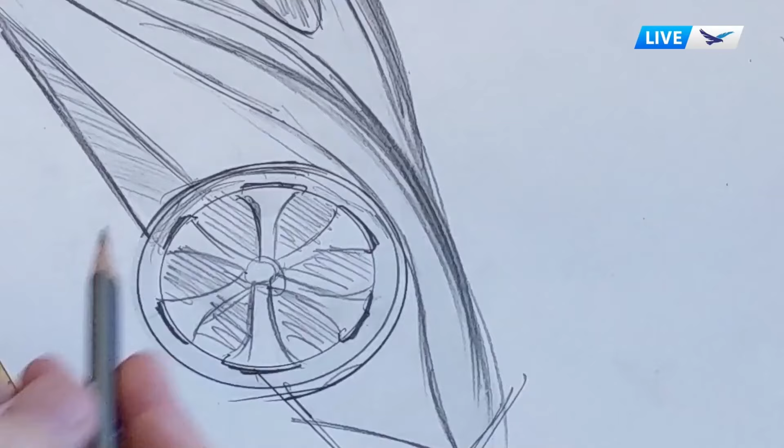Sure. Well, you know what? In my life, passion drives everything, and when things started out, I was always about drawing and designing and building things. And I did it not just for me, but for people around me. Because when I would show off a new painting or a new sculpture or a project, it would bring joy to people. And that's what it was about for me, getting that, hey, check out what I made. And you see that, what?

So for me, it was all about getting joy and capturing fun. And I feel like all designs, no matter what you work on, should provoke emotion, should stir emotion and get people excited. So at a very young age, I remember doing that with finger paints and Play-Doh and stuff. Likewise, creativity is where it starts, right?

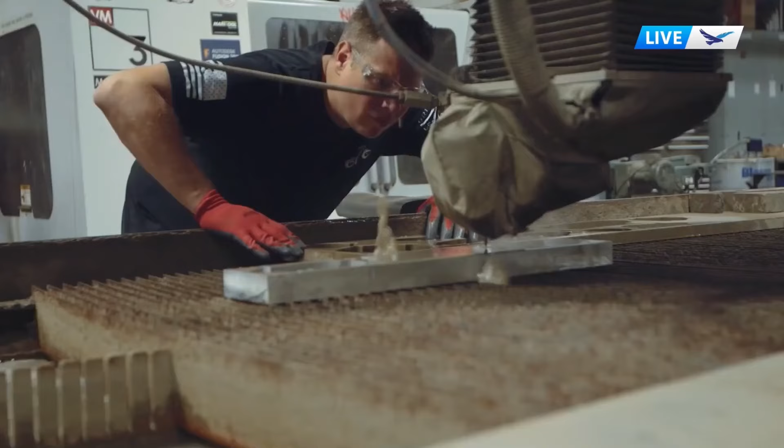I think we're coming up here in a few days on the official 30th anniversary of the first release of SolidWorks. A lot of people have been sharing what the first model they ever made in SolidWorks was. Do you remember yours? I do. For me, SolidWorks gave me power at my old job at Orange County Choppers. It allowed me to make things in real life. So I was making these parts and going right to the water jet and blasting them and hanging it on the bikes. And it just gave me power.

So I do remember my very first thing was a wheel. It was just a very basic wheel. I had 0.75 inches, is all I had to work with. So I had to divide that by 2 for one side and then mirror it over. And it was just a 3-spoke design, very simple. I look back at it now, I get the giggles, but it allowed me to make my dreams possible.

The first time you open a program like that and you realize you could make almost anything, it was almost overwhelming. That's how I felt. So before you started designing, it can be, right? But now that we're in that mode, when you get into a new tool, there's a fair amount of excitement that comes with it too, right? I think we can handle it now.

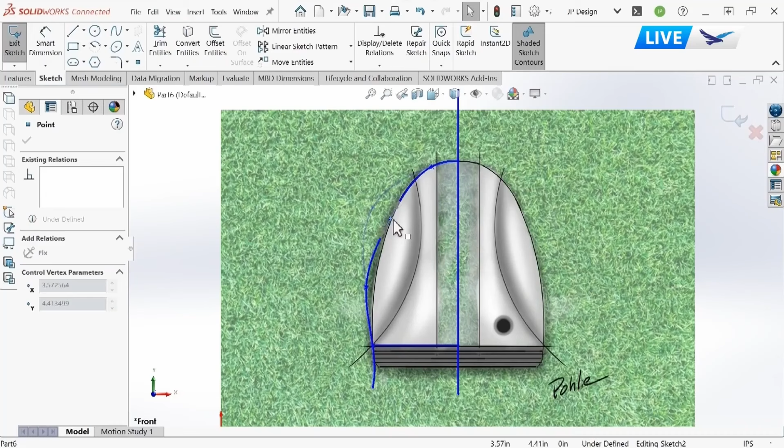You've got to overcome that little bit of fear of something new and unknown. And we all had that first time we were opening up SolidWorks and using it, and it hits you, but it's how you look at it. I looked at it as, oh, look at all these opportunities. I'm going to be able to take files right from here, right to the CNC machine, right to the water jet machine. So I looked at it in a different light, and really just tackled literally one sketch at a time.

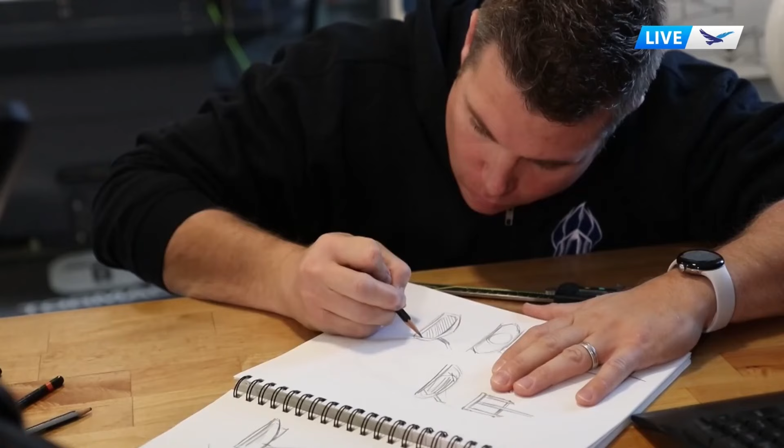Tell us about your design methodology. You've done many projects in your career. Where do you like to get started? Is it with that sketch? Is it with a pen and paper? Yeah, a lot of times I'll start with a pencil sketch and just sketch down a bunch of concepts. And then I build what's called an artboard, where I take different shapes and colors. It could be cars, it could be other things that inspire me. And I build an artboard.

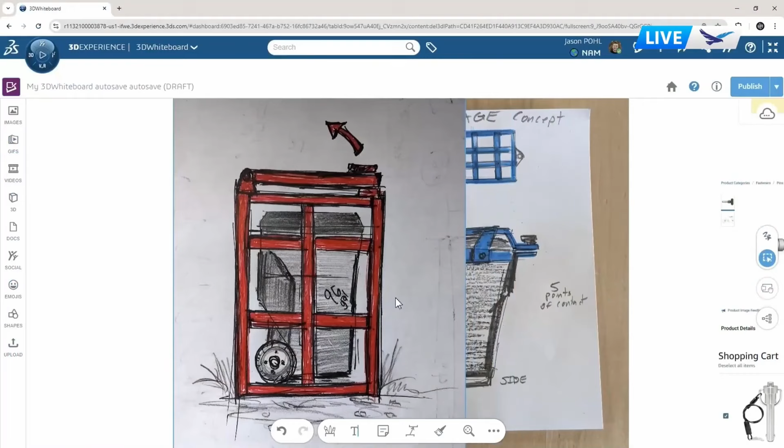And I've been doing that lately with the 3DWhiteboard tool. And it's great. I can just copy and paste pictures and add notes to it. But that way I have that one resource that I can go back to and constantly draw inspiration. So I put all my sketches from my sketchbook into the whiteboard, all the pictures that inspire me, and even useful links for future ordering of materials that I'm going to need. It's just super helpful. So that's kind of how I get started.

Yeah, that whiteboard is one of those things that everybody with a license of SolidWorks gets now. It's not well known yet. I started using it for project planning earlier this year, or even just reminders. And it's funny, right? You never think of SolidWorks as having that kind of stuff. It's a mechanical design tool, but it can do a lot.

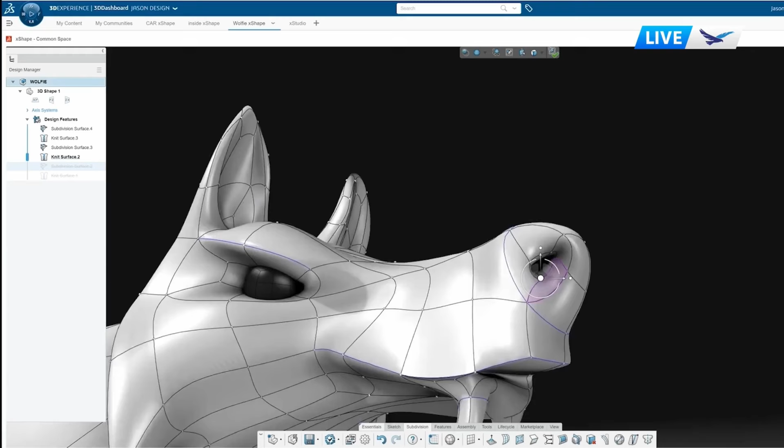Yeah. And another thing, getting started in projects, I used to have to flesh out the design ahead of time with sketches, with markers and pencil and paper, and then go into the software and really sit down and focus. But a lot of times I find myself opening up xShape and just doing really quick concept models, because in the sub-Ds I'm able to model so fast that sometimes that's better, because I see different shapes and contours in the 3D model that I can't really express with just a pencil and a piece of paper. So I often find myself jumping into xDesign, xShape, and just knocking out a quick concept in 3D space now.

Yeah, I remember struggling with how to do that in SolidWorks back in the day when we didn't have those sub-D modeling tools. I think my friend wanted me to design a spaceship for a video game for him or something like that. I'm like, I don't think I can. Not the right way. Right. It's all about the tools you have in your toolkit, right?

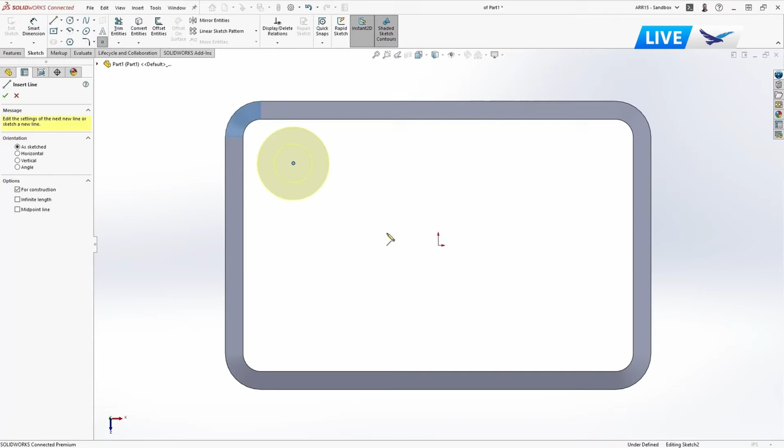For sure. So take me back to when you were just getting started. What were some of those early jobs where you used SolidWorks to create some of this stuff? Oh, so yeah, the first time I used SolidWorks, because I came from the video game industry, it was all polygonal based. It was all polygons, and I did some surface modeling too with splines. And when I was introduced to SolidWorks, I was introduced to the right way of doing things. I had an XYZ to work from, and I had real numbers, so I could draw a perfect circle, and I knew that was going to fit and be able to bolt onto the bike directly, because I knew it was going to be accurate.

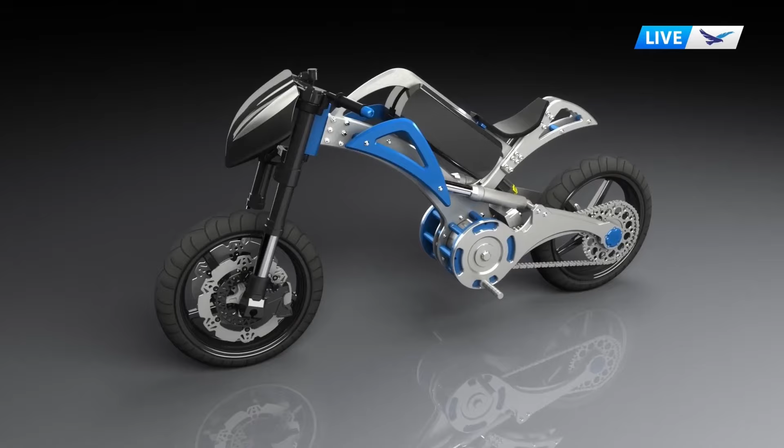So some of the first ones, we built a bike for Will Smith. It was called the iRobot. And that was the very first bike that I was able to sketch and work on and design. And I remember making a shift linkage for it, and then I did what was called a suicide shifter. So instead of using the actual foot, you could just grab this handle that came across the gas tank and shift gears with it. And then I got into doing mirrors and wheels and air cleaner covers and primary covers, and frame design. At one point in my career there, I even had a frame builder that I could punch in numbers and actually generate a frame that we'd then send to our fabricator to build.

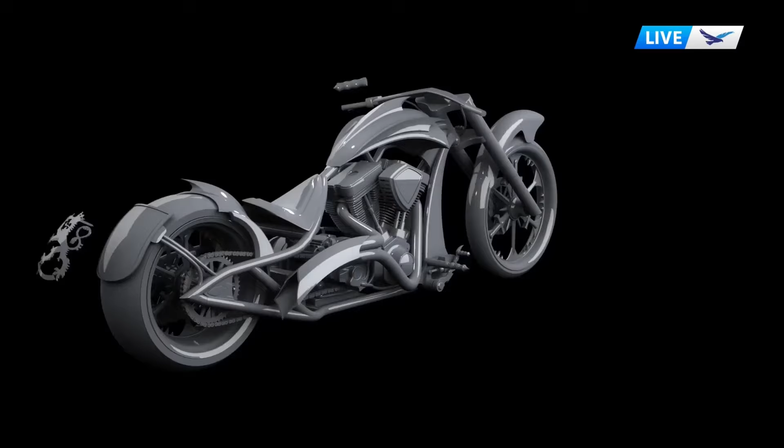The best thing about SolidWorks was I could always learn more. There was always more to know about it, and I just used a fraction of its power, and I love to learn. So I'm still to this day learning new steps and new procedures and new ways of doing things inside SolidWorks. That's pretty cool, the learning never stops. Yeah, and you got to stay fresh with it.

You'll learn a new way to make something that looks cool but has real numbers behind it. What are some of the other clients you worked with in your career? What are some of your favorites? Oh man, there were so many.

Muhammad Ali was great to work with. Bill Murray—it turns out he was a mailman in Illinois, and so was I for one summer, so we hit it off. He was great, we did the Caddyshack bike for him. Billy Joel made fun of my haircut, which was funny because he didn't have hair. But Tony Stewart, it goes on and on.

We did a bike for Shaq. That was really cool because he's just a huge person, so no one in the shop could actually ride the bike that we made. My buddy Christian, he was our lead mechanic—we made him stilts so he could shift gears, and he sat on top of the gas tank. It was huge, the bike was huge.

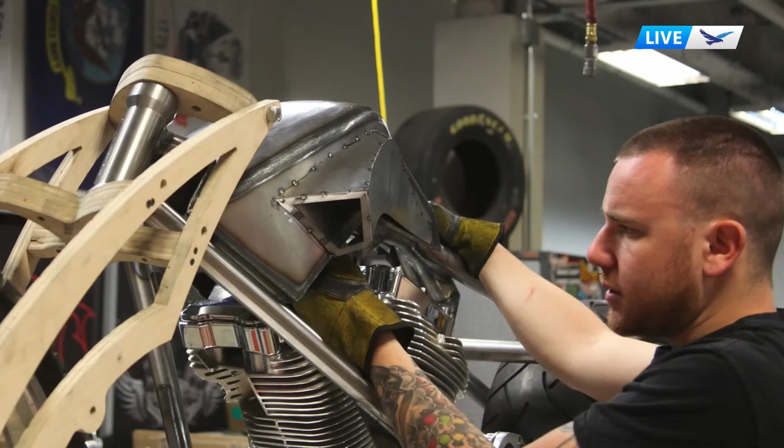But you know what, I got to work with all sorts of Fortune 500 companies, and I got to work with them and their ad agencies, and it really put me in a fortunate position. I got to travel the entire world, and I really cherish those moments that I was able to learn from the insanely talented team I got to work alongside of, and other people that really contributed to my role and success there, which was awesome.

You got to take a lot of these folks through the full engineering process, show them what it looks like to design something, prototype it, and test it. And that's a unique opportunity.

Yeah, that's what I do. Someone asked me recently what my workflow is like, and I created a 4-part creative design process. So it's real simple: the first part is understanding what exactly you're trying to do. Is this a personal project for you to make you happy, bring you joy?

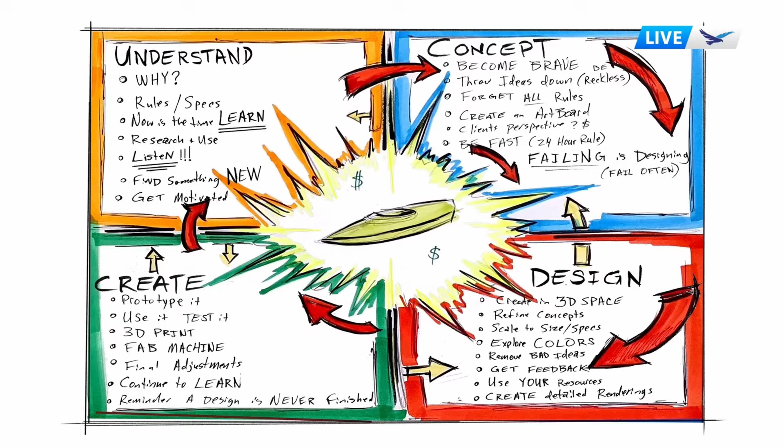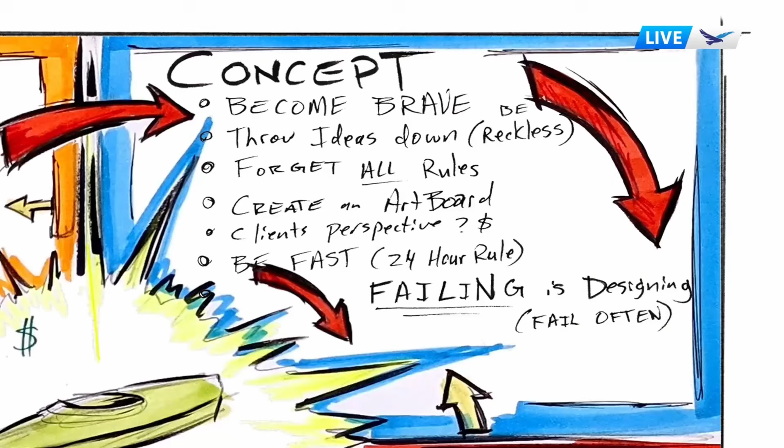Is it what the client needs? What's the competition look like? So the first phase is knowing what you're doing and what you need to do. Then the second phase, before I even enter it, is conceptualize—that's doing the artboard, the quick concept sketches, maybe adding a splash of color, maybe knocking in a quick model.

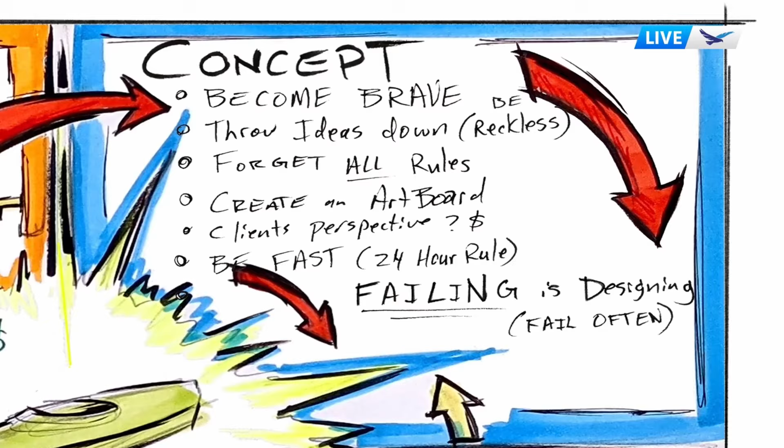Design is the third phase, where I really like to sit back and work in the details in 3D space, generate an amazing SolidWorks file, something that's manufacturable. Then the final phase is the creation phase or the make phase—that's where I do the 3D printing, the CNC milling, or welding.

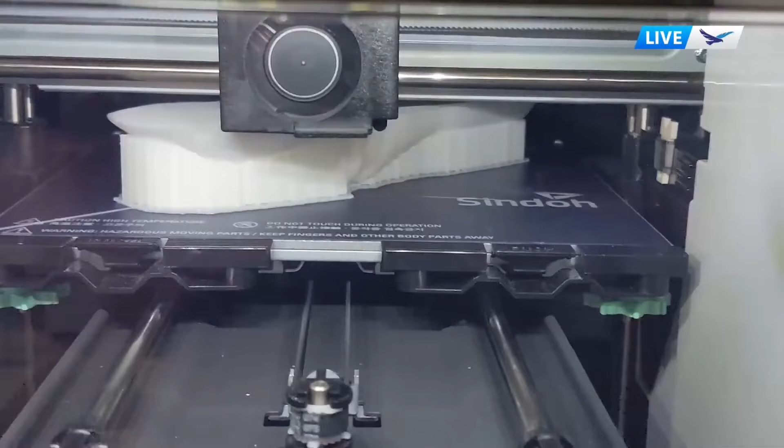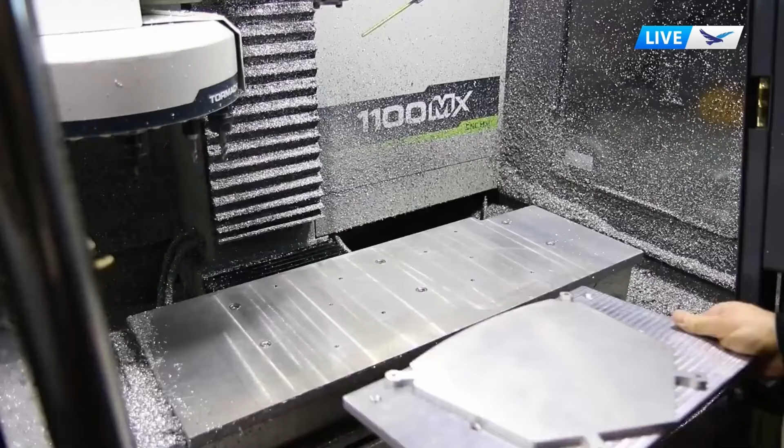It's endless, how you can make things these days is really tremendous, and that's what I love. I love the whole maker movement, how you can access equipment at different fab labs, how you can get lower cost equipment that you could never do before. It's really brought the power of design and manufacturing to the maker, someone that just wants to create and build. And that's what I'm here for—I'm here to have fun and just keep on building and keep on designing.

It's pretty exciting, right? There's millions of budding designers all over the world that have this opportunity now that they didn't really have in the past. You've obviously got a passion for not only being creative, designing new things, but sharing that philosophy with others. Is that why you decided to go work for SolidWorks? Yeah, that's exactly why.

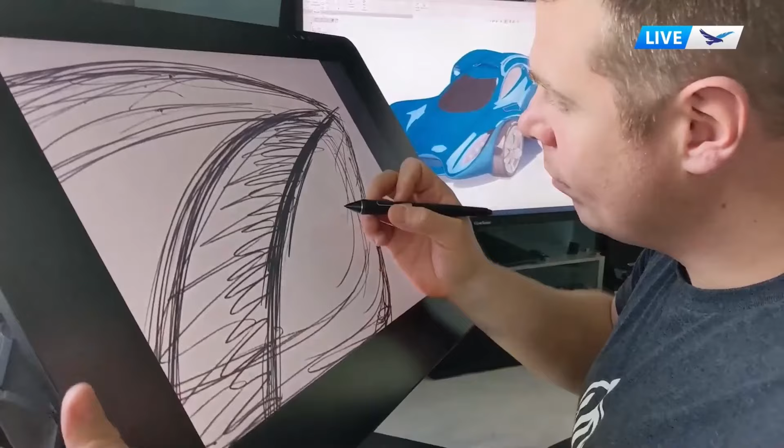When I was traveling a lot back in the day, I'd go to airports and a college kid would run up to me. Oh, hey, Jason Pohl. I'd be like, yo, what's up? And they'd say, I went to engineering school because of you. I'm a mechanical designer because of you. I saw you drawing bikes on that glass tablet, and I saw you creating 3D. It opened my eyes up to product design.

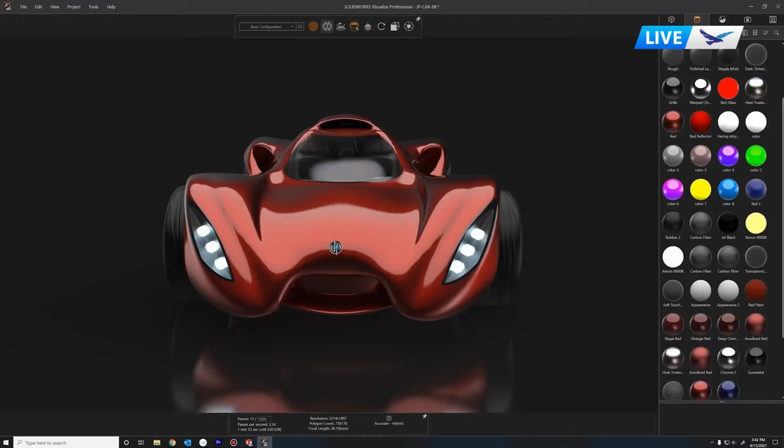I had an art teacher back in high school that opened my eyes up to the whole world is designed. You can design it how you want. You could be the creator of all these different things. And that inspired me, and I feel like a huge desire to help influence and design and inspire the next level of industrial designers. And what better place to do it and have the power to still be super creative, use state-of-the-art tools, get to test drive them first, and make sure they're ready.

And Damon, it never hurts to surround yourself with really smart people. And SolidWorks has done it right for so many years that I just feel honored to be part of the team. I really do.

Where else have you been sort of testing your skills lately? I'm hearing that you've been doing some stuff for the sporting world.

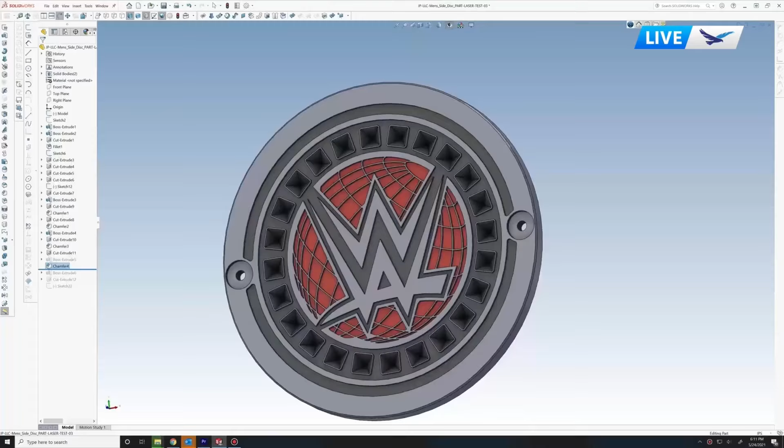Yeah, Damon, I definitely have a passion for sports, there's no doubt about that. And recently I just finished a fan Zamboni for the New Jersey Devils, which they use to give fans rides in between the periods of hockey. So that's really cool. And I also make all the WWE championship belts. I've worked with them since I think 2006, and yeah, I machine those right here on the CNC mill behind me.

So Jason, now that you're at SolidWorks, you're an industrial design champion. Tell us more about what that means. What do you do at SolidWorks?

You know what, Damon? I show that the dream is possible. Growing up, I had a lot of clients and client visits and bike unveils, so I traveled a lot. And people would always approach me and say that I inspired them and motivated them to be a designer or an engineer. And it was awesome, and that stuck with me. I wanted to be able to help people and influence people to make cool choices and build fun things and just have fun with life, because that's what it's about.

So I design and make products, and I capture my entire process and show off my workflow, and then I post them on the Made in 3D community on the 3DEXPERIENCE 3DSwym platform. The SolidWorks forums have always been a big part of that, and they're part of the 3D Experience platform now.

They're getting some momentum lately, and that's always good to see. Yeah, I love the 3DSwym platform because it's a great resource to see what other makers are creating, designing, and building. And a lot of times I get inspired by others there for my projects, so it actually works out. But yeah, basically, I'm the industrial design champion on the mainstream innovation adoption team, which is led by Justin Burton.

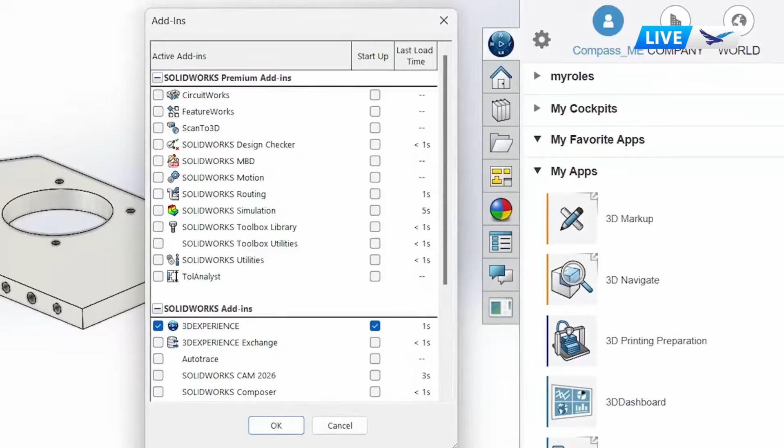AI is an incredibly hot topic right now, so let's lead off with that. Dassault continues to infuse AI into the 3D Experience platform, and since the 2025 release, we've seen 3 major additions in this space. Back in February, as part of that new development strategy, we got an exciting new tool that automatically generates drawings. That was a big addition for sure. Got a lot of buzz. Being able to auto-generate a drawing without manually doing it is pretty big.

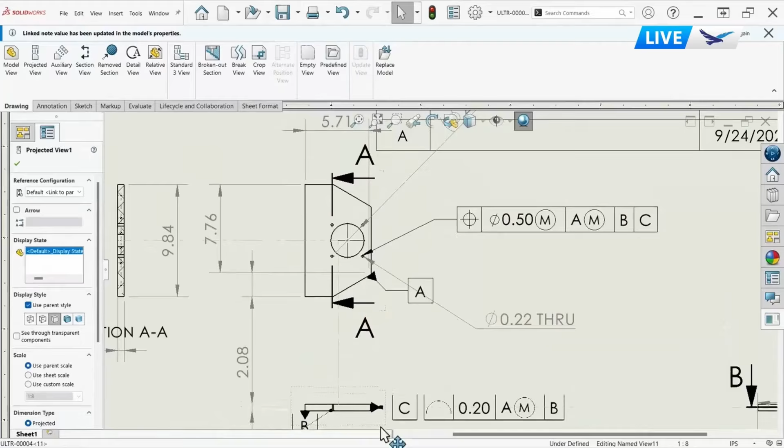And I've seen that they've already enhanced this feature for the 2026 release. It looks like it can do hole callouts now, section views. That's right. Section views, hole callouts, even on imported models. The best part, in my opinion, is the production or the result is a regular SolidWorks drawing. So you can continue to embellish it, add, remove, modify views, annotations, just like we've always done. But the best part is we're not starting from scratch anymore.

You can even generate multiple drawings from the assembly in the background while you continue working. It's pretty huge, this is game changing. I'm excited to also share that SolidWorks now automatically recognizes fasteners and can create SmartMates to speed up the placement.

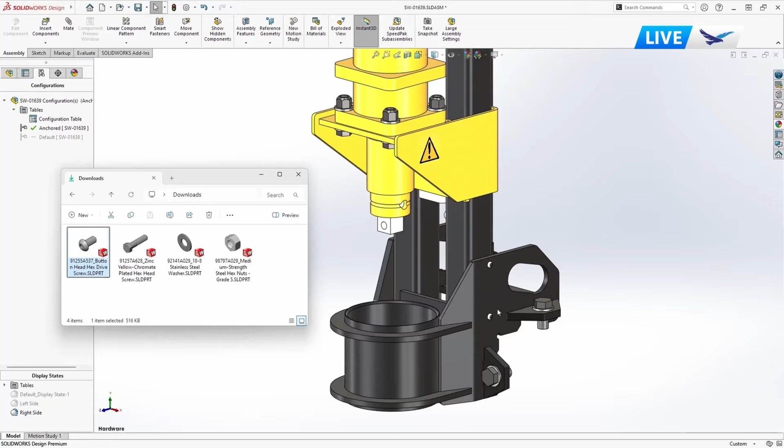So this option that's now enabled by default lets you snap components right into place instantly. And no setup required, so you don't need to predefine any mate references to make this work. As you drag your fastener into the assembly, whether that's done through the Feature Manager tree, Windows Explorer, or any of the other insert methods, you'll see the cursor kind of sparkle, and that's your indication that it's recognized this. The AI sees this as a fastener, and as you get your cursor closer to the hole, it's going to snap right into place. Just drop it, and the mates are created automatically.

That one's very slick. One tip I saw is that it looks like the AI determines the hole geometry and other things in the model based off the mouse position. So if you're not getting a good result, zoom in more, adjust the mouse, and maybe it'll pick it up. Yeah, that's right. The better you can see where you're placing that fastener in the hole, the better it's going to snap into place.

I have to admit that the AI enhancement that I've been the most excited about, it's not necessarily a SolidWorks command. There was a lot of buzz earlier this year about a new AI companion for SolidWorks, which promises to help you work smarter by giving you context-sensitive guidance or automating tasks or offering suggestions in your design. That's right, it's called Aura, and you can access it right now inside the 3DSwym app or directly from inside the SolidWorks task pane.

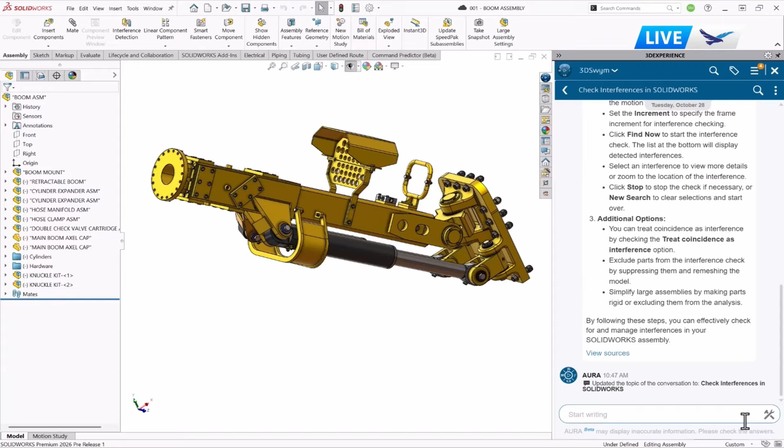You know, I've been using it when I need quick help. It pulls from the SolidWorks help files, installation guides, training manuals, the knowledge base, and even the user forum to give you answers you can be confident in, but saving you the time of searching. Yeah, the fact that it's trained on those trusted sources, that's pretty big. I honestly think this is just the beginning. Right now, Aura can recommend workflows and guide you through these different documentation pieces and all that.

But there's a lot of promise in here, right? We've seen tech demos showing everything from having it automate features for you, or even driving SolidWorks completely, creating a part from scratch after you feed it a sketch or an image. Yeah, those tech demos are so cool. I can't wait to see what the future holds for us.

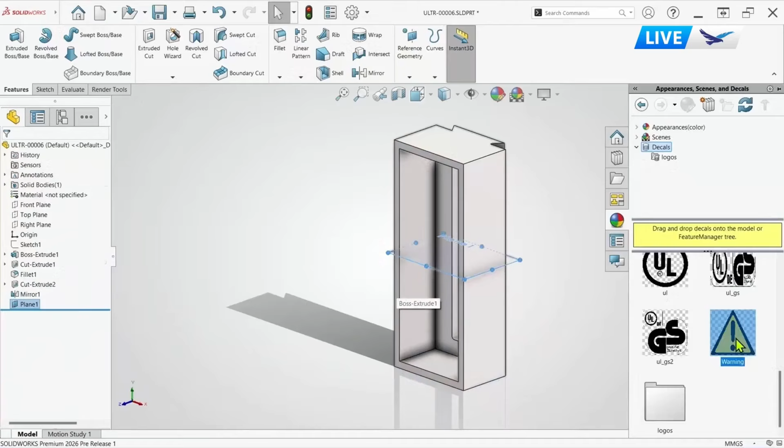So here in the demo, you can see we're adding a plane, putting in a decal, but none of this would really impact the assembly. And with the new option, it no longer sets that rebuild flag. Now you'll know that changes have occurred because there's this bracketed asterisk in the title bar. A great new enhancement to focus your energy where it counts, not rebuilding for cosmetic things when you may not need to. That's pretty big.

We've all seen some of the very large and complex assemblies that our customers create. So being able to put those finishing touches on the design without slowing down, that's going to be a really nice experience. I think the users will love that.

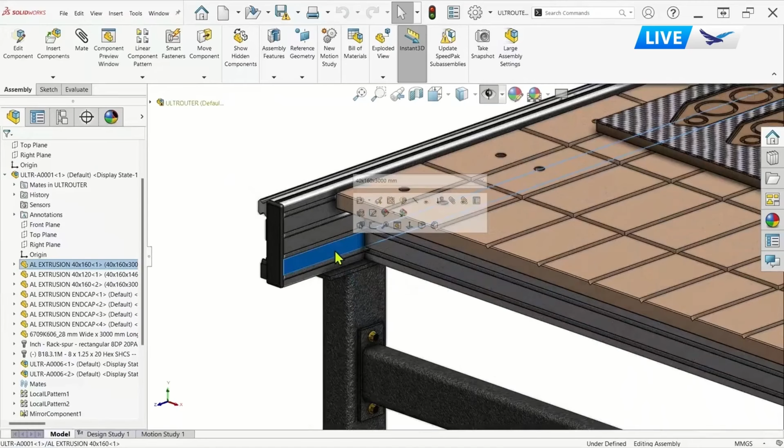Speaking of time savers, let's talk a little bit about configurations. They've always been a great way to create simple design variants really fast without creating piles and piles of files. But those design tables sometimes need to be represented as their own files, and historically this was a little bit challenging. Happy to say that now in 2026, you can split configurations into individual files, one or many at once. So here in the assembly, we've got this part file that contains a couple of configurations, and we'll go ahead and use the split configurations command right from the configuration tree.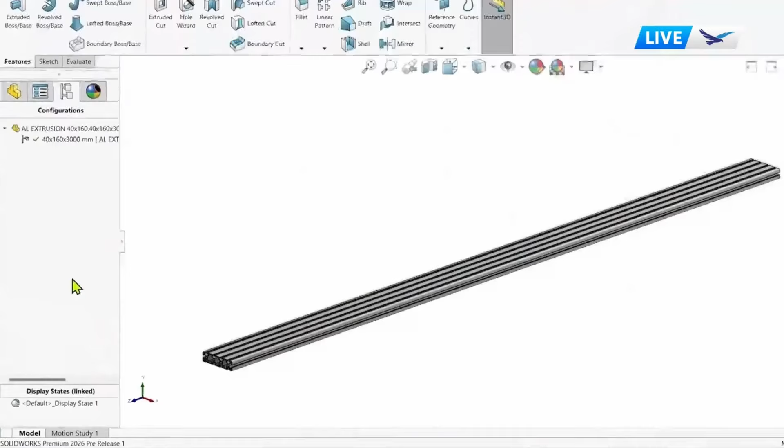You can choose to split out one or all of them, and the best part is there's this update where used function, and SolidWorks is then going to remap referencing assemblies and drawings to the new part containing a single configuration. So we've got that done. Here we'll open up the part and you see a single configuration. No macros, no manual work. This is a great enhancement, Damon.

Yeah, I mean, I love those design tables. Being able to build out an entire part library from one Excel table, that sounds pretty amazing. Of course, we've seen that some of our customers also want to use design automation on very large and complex assemblies. They might need more advanced capability like rules-based automation or even a configure price quote solution so that you can select a custom version of a part.

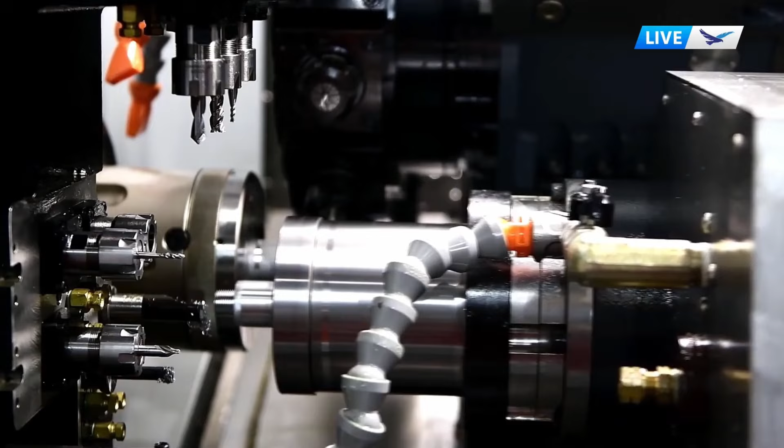Beyond CAD, what else stands out this year? Well, there's a pretty big one from HCL CamWorks. They are launching dedicated support for Swiss-style CNC machines. Ooh. Okay, tell us more. So if you've worked with Swiss, you know that they're incredible at producing small, high-precision parts in large volumes. Basically, it's a machine where the stock slides through the spindle. It's kind of like a lathe that feeds material in through the chuck. They're truly mechanical marvels, but the programming has always been tricky with workarounds abound.

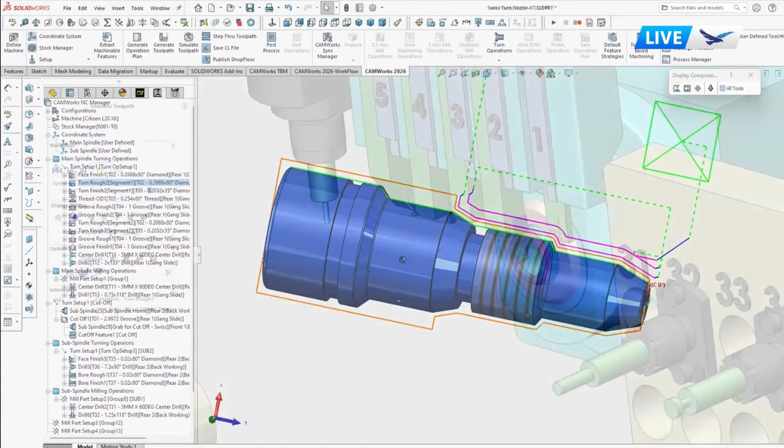But the new CamWorks Swiss module uses the proven CamWorks automatic feature recognition technology. This works on native and imported models to identify machinable features. These are things like holes, pockets, contours. Then CamWorks will apply your proven machining strategies to generate toolpaths automatically. This allows you to capture your shop's best practice or how you do things for more consistent results, and of course when the inevitable changes happen, these toolpaths are connected to the geometry and update automatically.

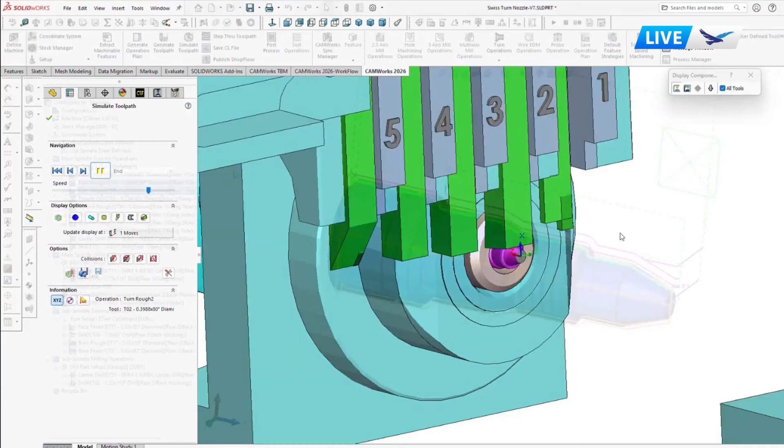Yeah, I mean, that's the CamWorks way, so it's good to see that's still going to function that way for Swiss. Of course, I'm sure that not every customer is in the watchmaking industry, but Swiss machining has been used in medical device, aerospace, high-tech electronics. I imagine folks in those industries are really excited about this announcement. Absolutely. I'm excited about it.

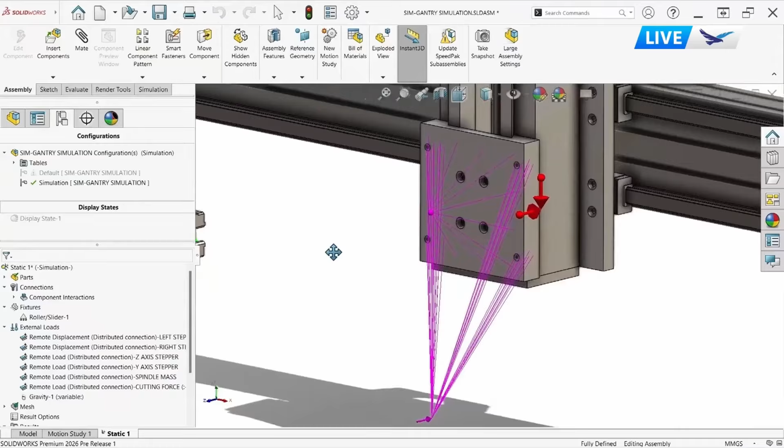Damon, speaking of precision, like the Swiss machine gives us, there's a new simulation enhancement that's going to make it easier than ever to understand how our design behaves. You're going to know about that. I do know a little something about this one. If you're in simulation, you might be aware that getting angular displacement in your results is not always the easiest thing. If you look at some finite elements, typically you've got to check the X, Y, Z displacement in your elements and do some trigonometry to figure out what the angular rotation about an axis would be.

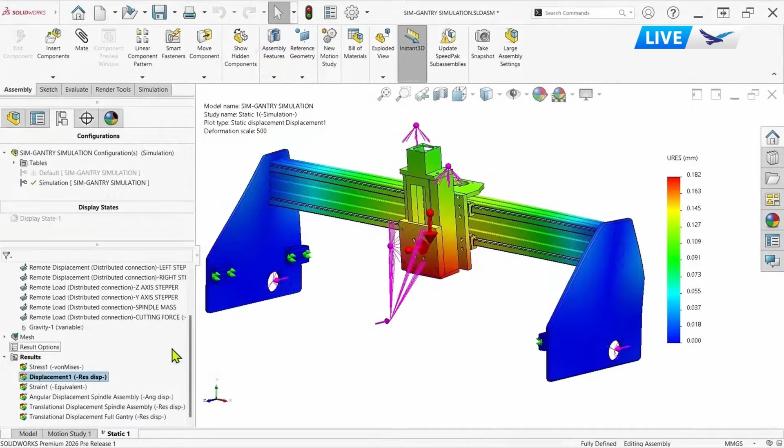So SolidWorks looks to have addressed that this year. They've added a new feature where you can pick an axis in your model, and that'll create a plot for you calculating that angular rotation. Of course, that means the result's going to update as soon as you run the simulation. It should be great for optimizing torsional stiffness and other things like that in your design. Absolutely, giving the users the direct answer they want versus inferring.

This is really a good one, and we did a little bit of testing here, and we found that it's not available for mixed mesh, so that's where you have solids and shells commingling, but it is supported in the nonlinear study. So I just love how SolidWorks continues to enhance the software and take away the manual workflows that we've been doing for years and give us that direct answer.

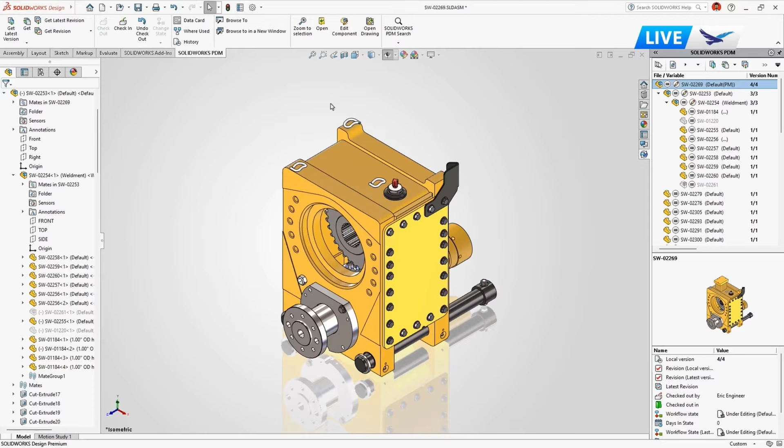Absolutely. What about the data management world this year? Yes, SolidWorks PDM is getting a bunch of great enhancements. These are user-driven enhancements that are commonly requested. Improved previews for other CAD file types, the ability to archive an entire workflow in a single command, but the biggest one, in my opinion, is transfer ownership. Behind the scenes, the archives now periodically back up the changed files from the local cache. This means when a file is checked out on one machine, it can be easily transferred to another automatically, even when that user is offline.

So this is perfect for situations where someone's out and you need to get that file and you don't want to lose the work that they've put into it, or where there's a hardware failure. Yeah, that one's huge. I mean, the worst happens, somebody becomes unavailable. The last thing you want to do is call them up at home and beg them to send you some files. So the fact that you can reassign ownership from that backup now, move along with the project, that's got to be huge. Yes, we've been hearing from CAD admins requesting this for quite some time, and happy to say we've got it.

Now, if you're still managing revisions with Pack and Go and appending rev numbers to file names, this is how I got through my senior design project, but there's a much better way. So check out our Get Latest session coming up in about an hour to learn more about the entire data management solution, from PDM to PLM to managing your files on the 3DEXPERIENCE platform. Whether you're a CAD admin or just looking to learn more about data management, you'll see the tools that matter most. I think we have time for one more.

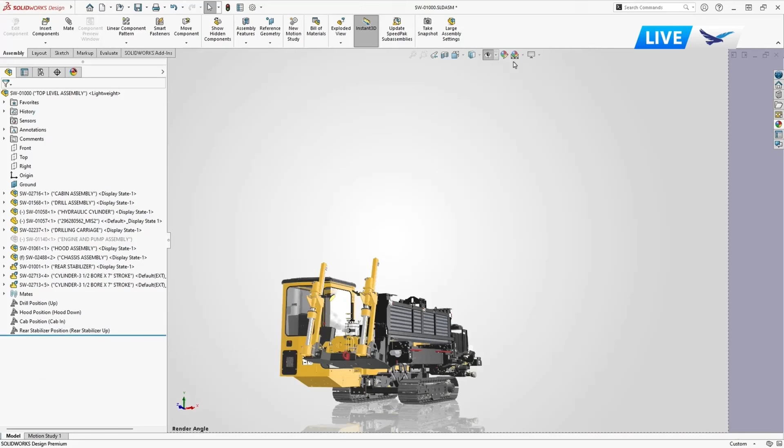What can you tell us about photo rendering? Yes, a nice enhancement this year. SolidWorks 2026 is going to make rendering easier than ever. You can now create photorealistic images directly inside the SolidWorks interface. So no need to launch Visualize separately anymore if you don't want to. Visualize has always had its own interface, which is great for non-CAD users like marketing teams who are creating magazine quality rendering and not using the SolidWorks interface to do so.

But many designers prefer to stay in that familiar SolidWorks UI, and now they can. So with the Visualize rendering add-in enabled, just use the brand new render command, set your image quality, and start rendering right from there, right inside the CAD window. This is an awesome one. Sounds awesome. I've got to say, that's quite a list. It's exciting to see that even after 30 years, this community is still focused on the real work that engineers need to do every day and how to improve the tools that they use every day.